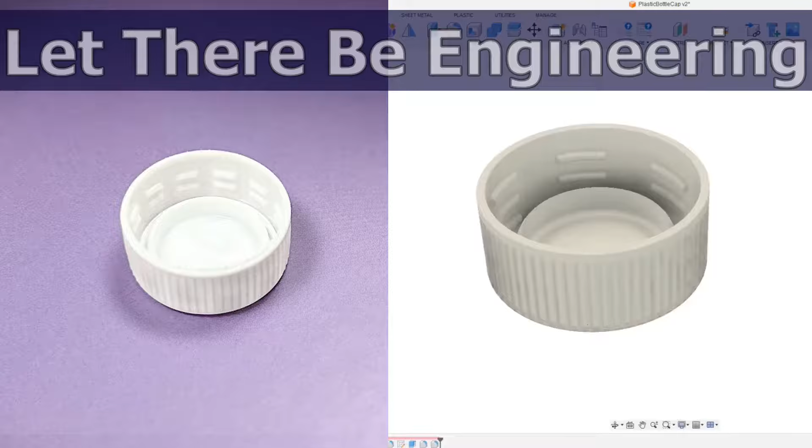In this short tutorial, I'll show you how to model a plastic bottle cap in Fusion 360. Let's start by selecting a new sketch and select the XY plane. We're going to create a bottle cap at the origin of this XY plane. Select the circle tool and sketch a 30mm diameter circle.

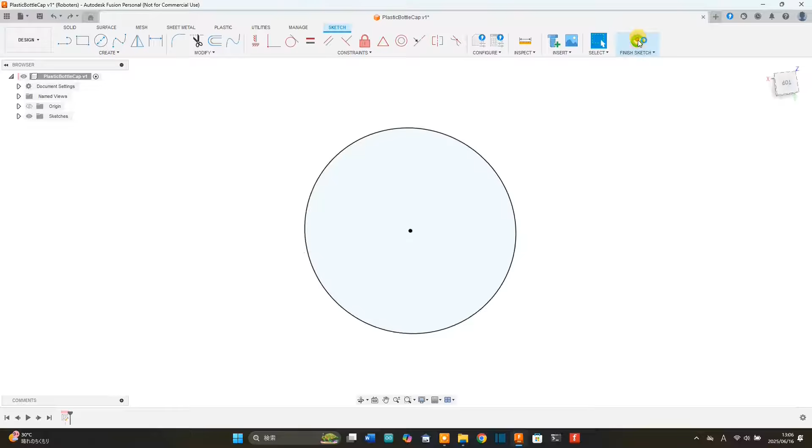Finish the sketch, select the extrude tool and extrude the circle by 0.85mm. Select the top face of this extruded body and create a new sketch on it. Select the circle tool and sketch a 27.7mm diameter circle centered at the origin.

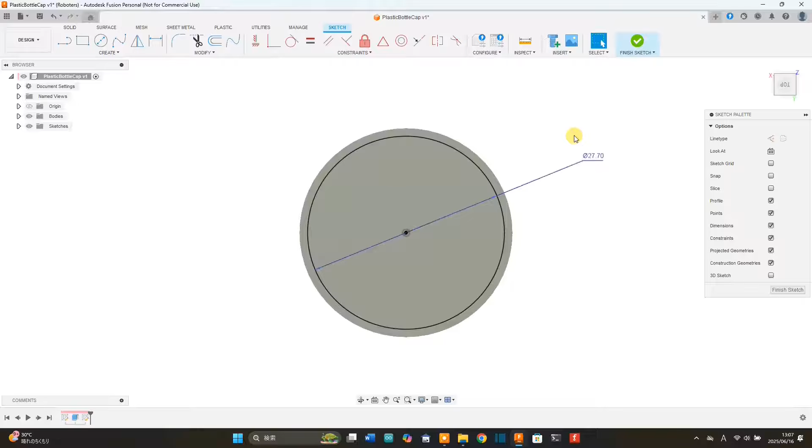Before we carry on, it might be a good idea to project the outer 30mm diameter circle onto the current sketch. We can do that by pressing P for project and then selecting the outer circle. Hit OK. Select the circle tool and sketch a 26.4mm diameter circle, also at the origin.

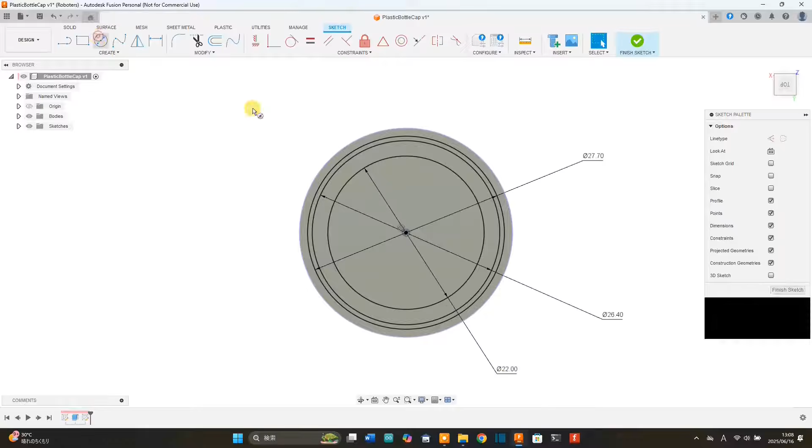Select the circle tool again and sketch a 22mm diameter circle. Lastly, select the circle tool again and sketch a 20mm diameter circle, also at the origin. Finish sketch. Select the ring portion defined between the 20mm and the 22mm diameter circles. Grab the extrude tool and extrude upward by 4.8mm.

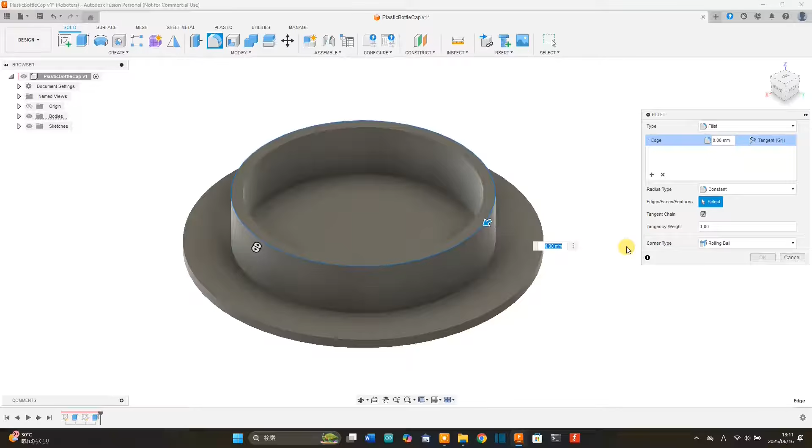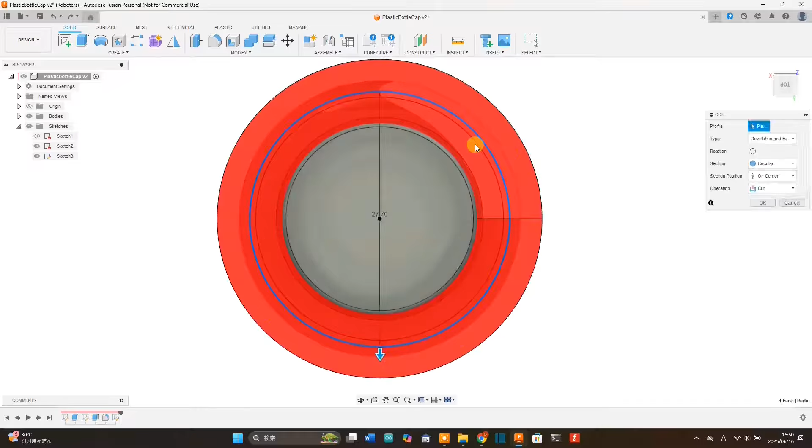Select the XY plane, move to the top view, go to the origin and set the diameter of the coil to 27.7mm. There we have an initial giant red coil. Set the number of revolutions to 2.

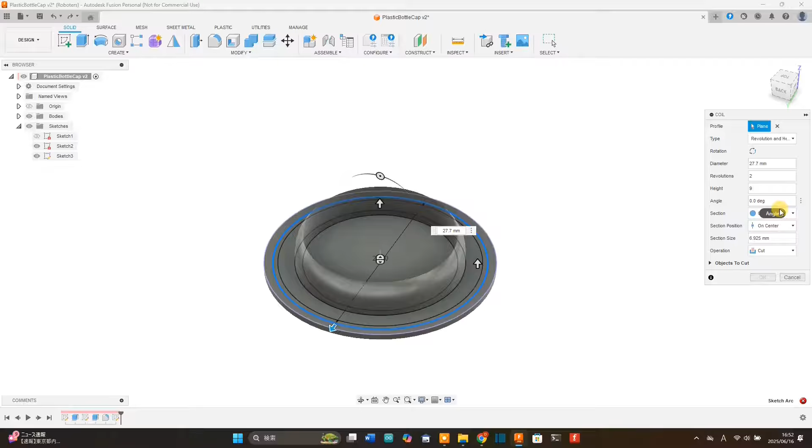Edit the height to 9, which immediately gives an error because the coil wire diameter is too large to wrap around by 2 revolutions within a height of 9mm. But don't worry about that error because it will fix itself as we continue to set the remaining parameters. The angle is fine at 0 degrees, so let's move on to the shape of the section.

I initially selected an inner-facing triangle, but I changed that to a square section, as you'll soon see. Let's set the section size to 0.65mm, quite small. Set the operation to join instead of cut.

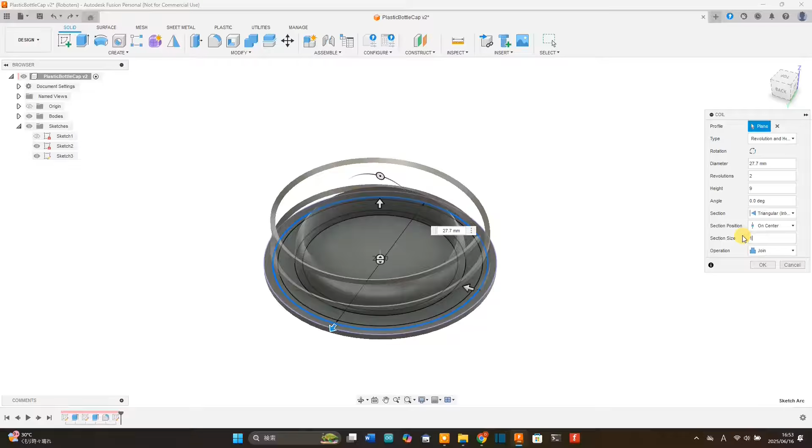Actually, the thread is too skinny, as the section size needs to be 1.3mm, not 0.65mm, as we're not specifying a radius. Also, let's change the shape of the section to square and hit OK. Zoom up to the upper edge of the square coil. Select this edge, select the fillet tool and give it a fillet of 0.4mm.

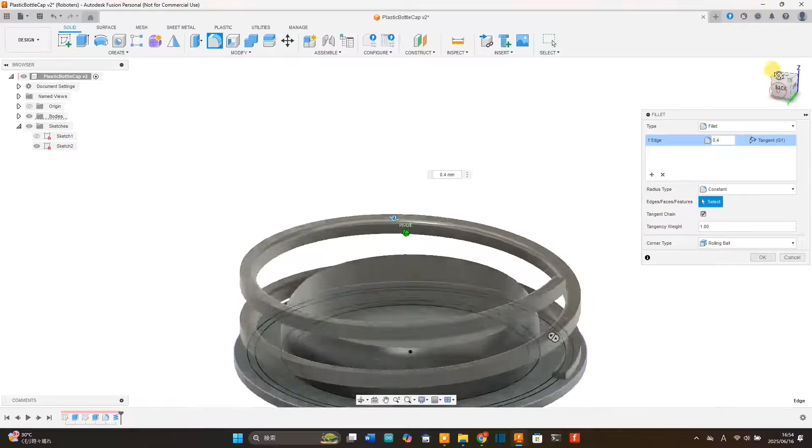Now before we hit OK, let's add a fillet on the lower edge of the square coil. Hit the plus symbol and give this edge a fillet of 0.4mm as well. Now the thread is looking a bit more realistic.

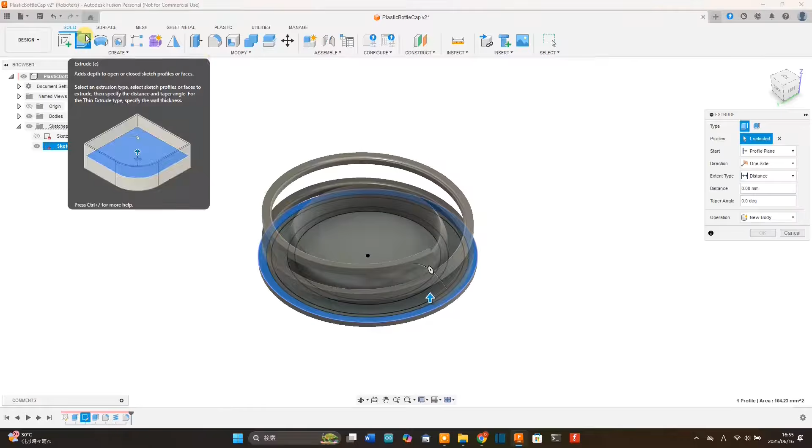Next, select the portion that defines the outer wall of the bottle cap. Set the extrude height to 13.4mm minus 0.85mm, the thickness of the base of the cap. Change the operation to join and hit OK.

Now let's switch to the top view, hide the body for now, and edit Sketch 2 by right-clicking it and selecting Edit. We're going to cut out segments of the thread we just made. Select the Line tool and sketch a vertical line up from the origin to the 27.7mm diameter circle. Sketch another line from the origin, this time at an arbitrary angle.

Select the Dimension tool, and I set the angle between these two line segments to 30 degrees. But actually, the real-life bottle cap has smaller segments, so perhaps a 15-degree angle would be better, or a smaller angle for the cutouts than for the sections of the thread, as in this case.

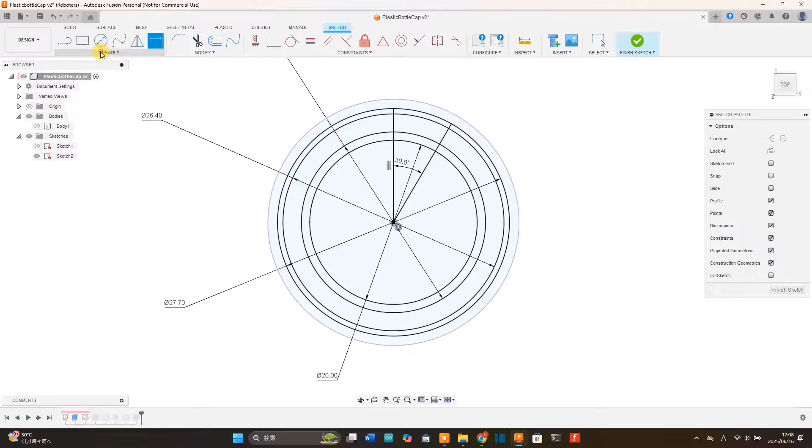Then, from Create, select Circular Pattern. Select the line segment that is angled at 30 degrees as an object. Go to the Circular Pattern palette and activate the Center Point selection, and then select the center of the circular design, which is at the origin, as the center point.

The number of segments, or the quantity, defaults at 3, so Fusion 360 has ignored the 30-degree segment itself because I only selected the second line segment. 360 degrees divided by 30 degree segments is 12, so you just need to input 12 for the quantity and hit OK.

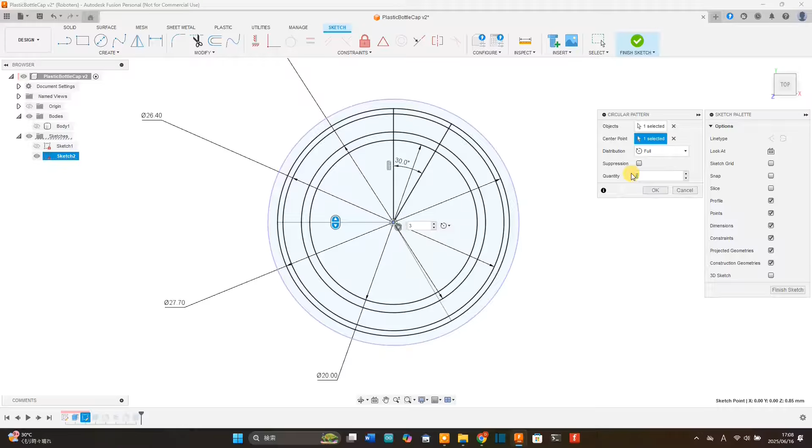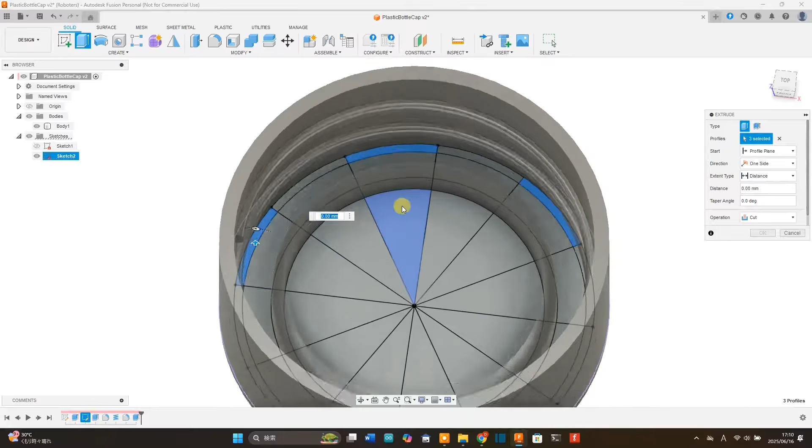And there we have our design divided into 12 30-degree segments. Finish sketch. We can unhide the body now and tilt the design to one side a little. Select the extrude tool, change operation on the palette to cut, zoom inside the cap and select every second segment that is defined on the ring area upon which the thread is formed.

Then set the extrude distance to 9.5 millimeters. Hit OK, and there we have the cap thread with each alternate section cut out. Hide sketch 2. Let's rotate the design and have a good look at the thread.

Okay, so the pitch of the thread looks a little too large, so let's go to the timeline and edit the coil feature. Let's change the number of revolutions from 2 to 2.5. Hit OK and see how that looks. I think that's looking a lot better.

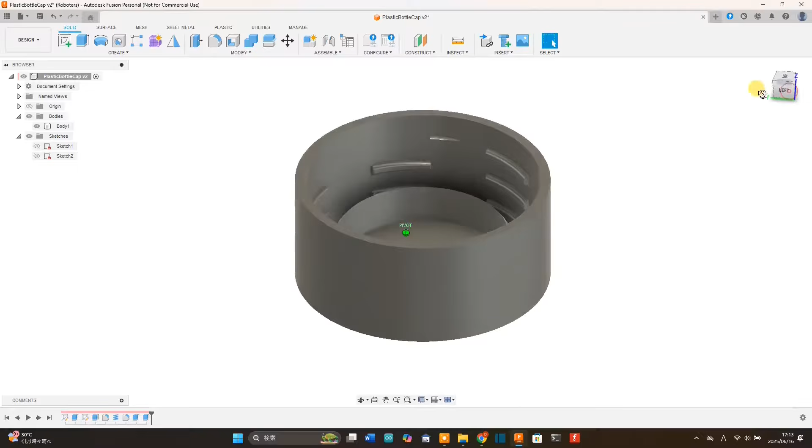Rotate the design and select the top face of the bottle cap. Actually, before we carry on, let's just change the camera view from orthographic to perspective. With the top face of the bottle cap selected, select the fillet tool and add a fillet of 1 millimeter. So that's starting to look a bit more like a bottle cap.

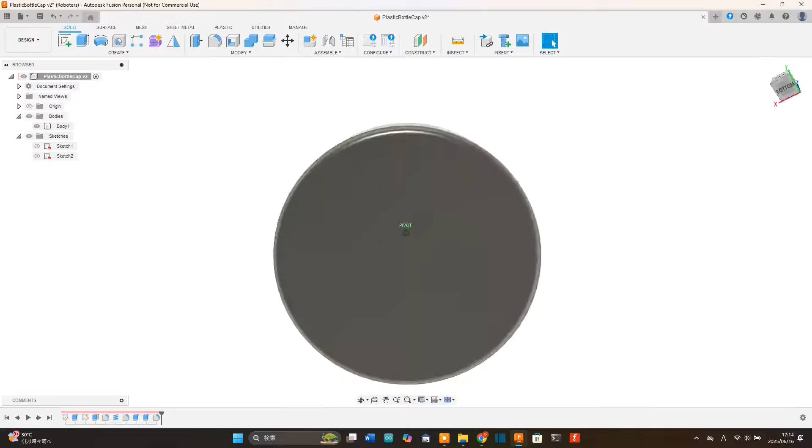Now we want to knurl the outer cylindrical face of the bottle cap. To do that, select the face of the ring-shaped edge here and create a new sketch. We probably should revert the camera back to orthographic. Press P for project and select the outer ring-shaped face to project the 30mm and 27.7mm diameter circles.

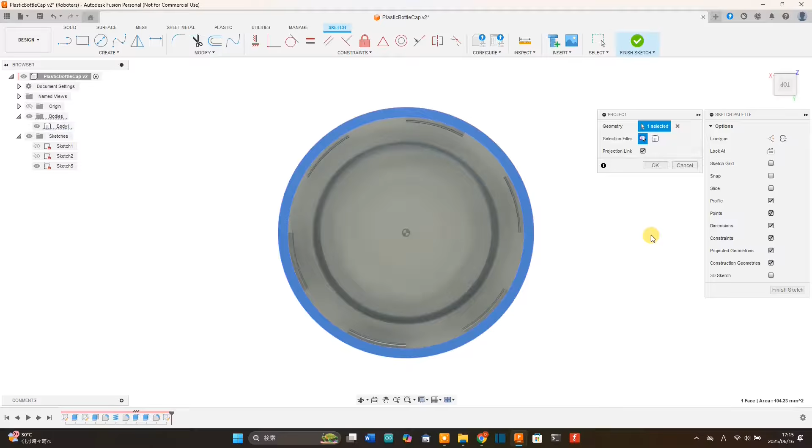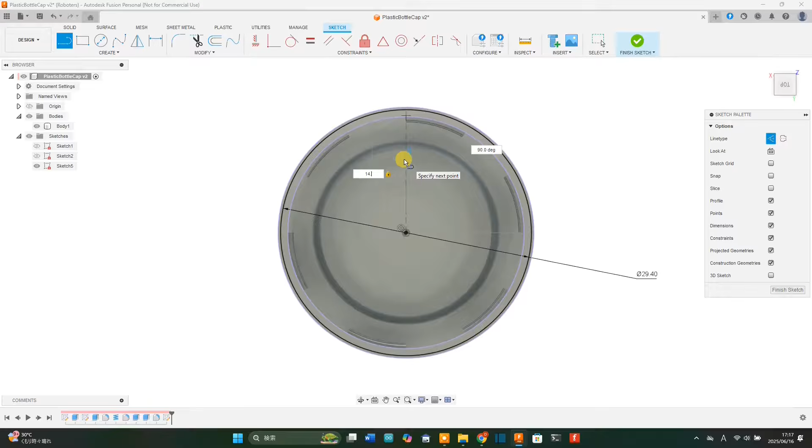Hit OK. Select the circle tool and sketch a circle having a 29.4mm diameter, which leaves a 0.3mm radial gap from the outermost 30mm diameter projected circle. Next, select the line tool and change the line type to construction. Sketch a vertical construction line from the origin to a radial distance of 14.7mm, which ends up being on the 29.4mm diameter circle we have just sketched.

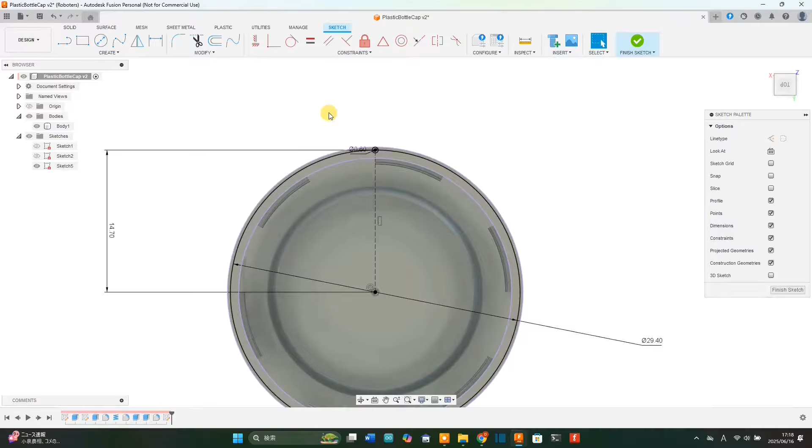Zoom to the top of the construction line, select the circle tool and sketch a 0.6mm diameter circle. Actually, we need to revert to the solid line type. So there we have our first 0.6mm diameter circle. Now go to the Create menu and select Circular Pattern. Then select the circle we have just sketched as an object, which is to be repeated as the circular pattern, and select the origin as the center point.

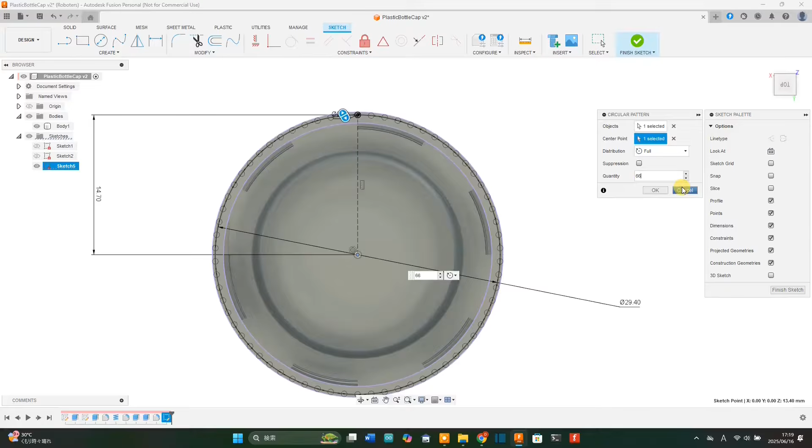Fusion 360 sets the number of objects to a default of 3 objects, or 3 circles in our case, but I chose 66 circles to represent the knurled ridges that form the knurled cylindrical surface. Hit OK, and now we can finish the sketch. Let's zoom into the peripheral area of the design, select Extrude. First, let's change the operation to cut.

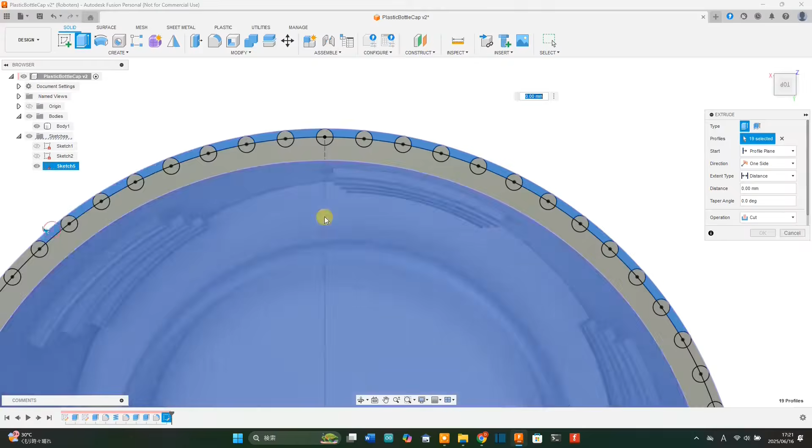Then proceed to select each outer segment that is defined between neighboring circles. This takes quite a bit of time to do, so I'll speed up the video. Go around and do that along the entire periphery of the design. So there in the extrude palette, we can see that 66 profiles have been selected.

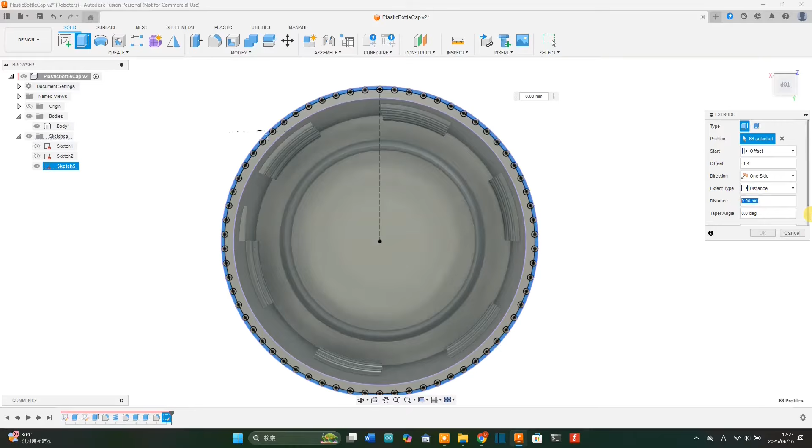Now we don't want to perform the cut operation from the top of the ring-shaped face, but at a position offset from there. So let's select Start to Offset and enter an offset distance of minus 1.4 millimeters and set the extrude distance or cutting distance to minus 11 millimeters. Let's tilt the design so we can see how the extrude operation will go.

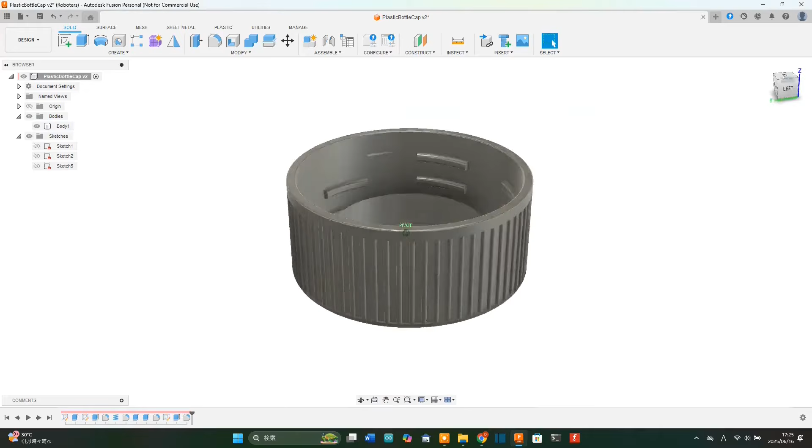That's looking about right. Hit OK and see what we get. Yes, so that's looking like the type of knurl you would see on a plastic bottle cap. Select the face of this rim here, select the fillet tool and create a fillet of 0.2 millimeters, which will form on the inner and outer circular edges. There we go, looking even more realistic now.

This inner circular corner would also benefit from a fillet as well, I think, so let's apply a 1 millimeter fillet there. Lastly, let's give it a color. So select the entire design with the cursor, press A for appearance, search for a color of your choice. I chose a white pigment, and there we have our plastic bottle cap design completed.